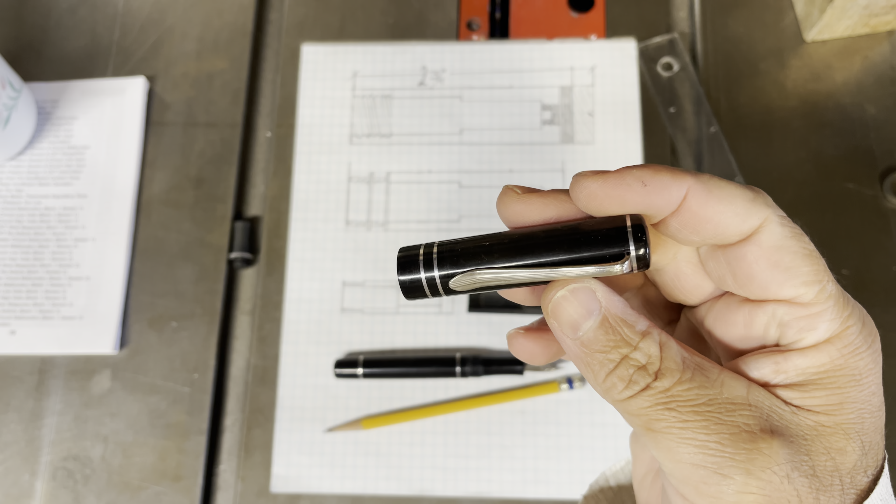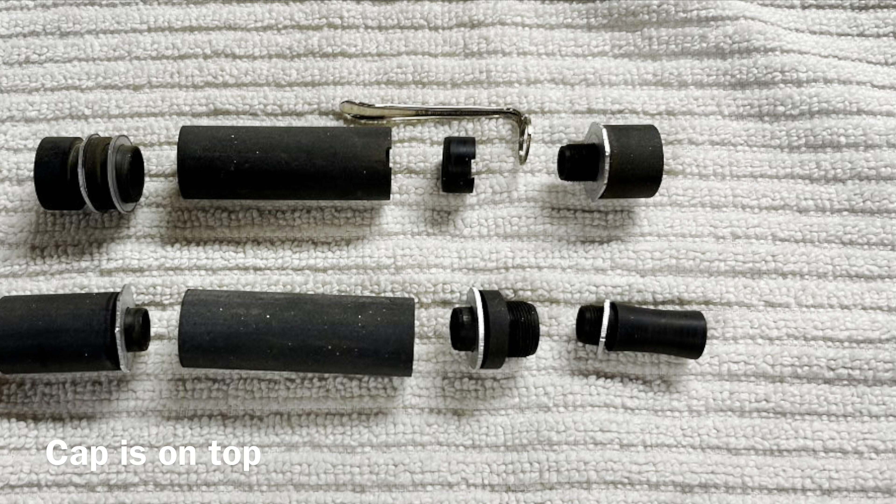In this video, I'm going to be working on the cap again, redesigning this. I like the way this cap came out, but I ended up using a whole lot of ebonite to make this, and I'm trying to simplify that process down. Exploded view of the cap on top. So I've been thinking about it for a while after I made this, and although I like the way this unscrews, I think I had overthought it and made too many components in order to make a simple pen cap, even though there's nothing simple about it. So with that, let's look at the drawing.

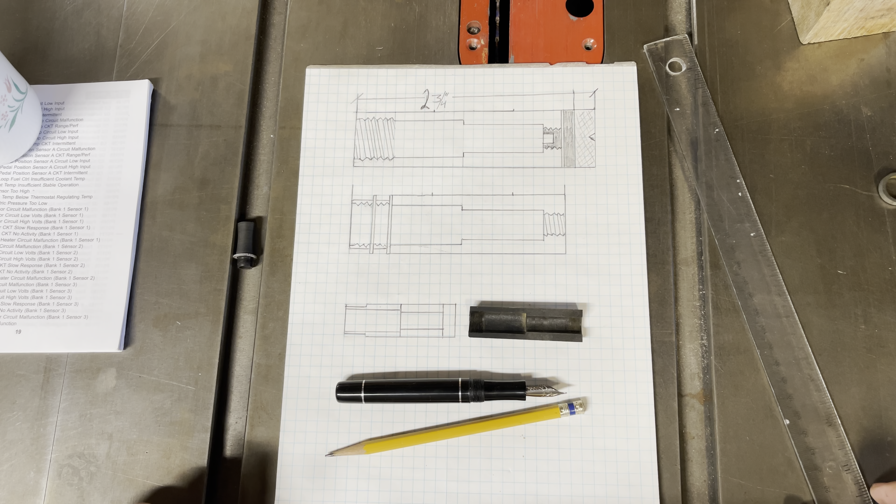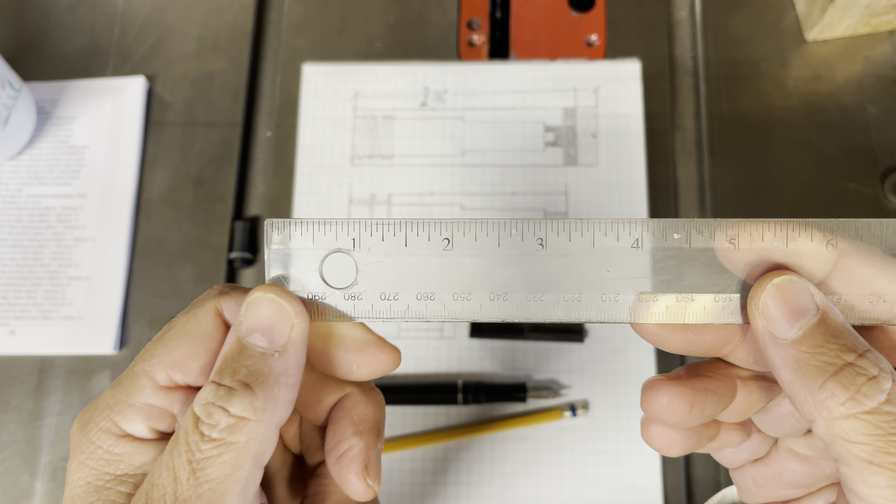And to help understand this, I drew this out on graph paper, and each square is 1/8 of an inch. So 1/8 of an inch here in the US, since pretty much we don't use the metric system as a standard, unlike everywhere else in the world. If it was metric, it'd probably be a lot easier to understand. But this is an American ruler, and one inch is divided out into 8 sections, 1/8 of an inch. You probably understand the concept, even if you're not from the US. So anyway, this is drawn out in 1/8 of an inch. So 8 squares is 1 inch. That way you see a little tab right there. Bring it in a little close. So this is 1 inch.

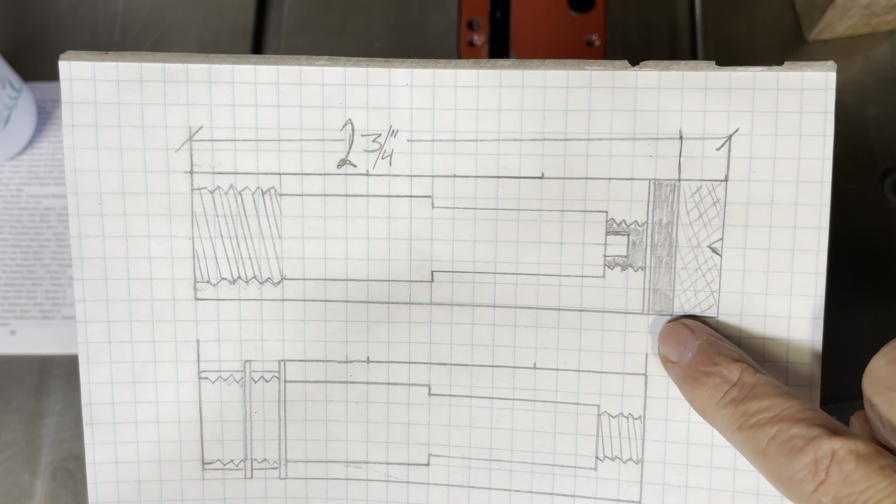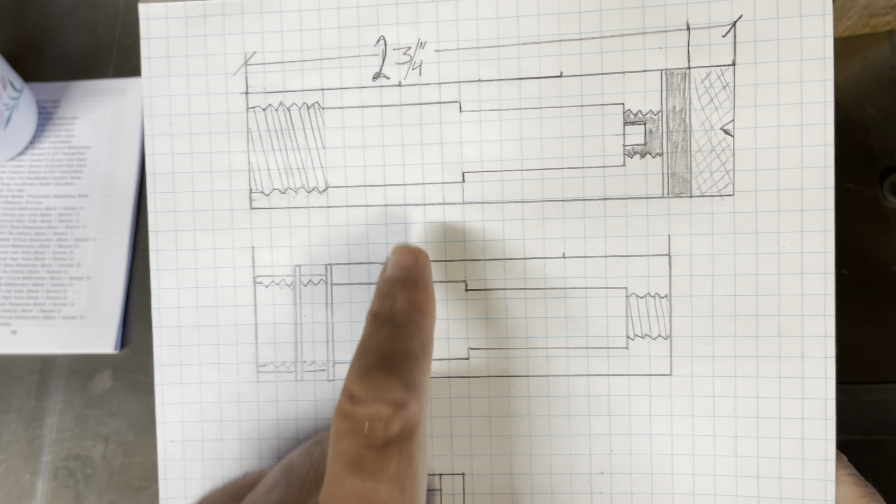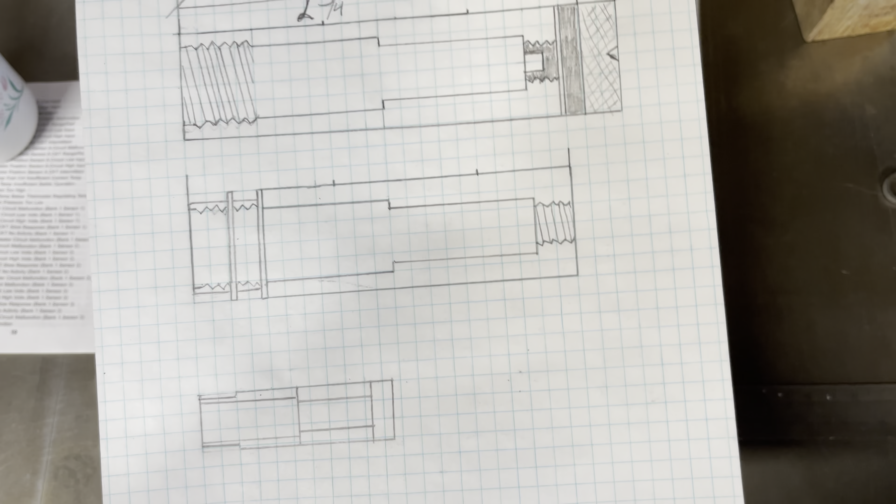This is 2 3/4 inches, and I'm working with a blank that's 3 inches long, and I'm cutting off 1/4 of an inch, and I'm using this for waste right here. That's why that's sort of hashed out. And then this would be the cap finial, like you see right here. This is the cap finial. So this right here is obviously for the pen in the section, and then the nib. And if I were to put this in here into scale, that would go in here like that. So you kind of get the idea, but without using quite so much ebonite like I did here. And I want to try something a little bit different by cutting off the outside, which would be over here on the bottom. Instead of working this way, I want to work the opposite direction.

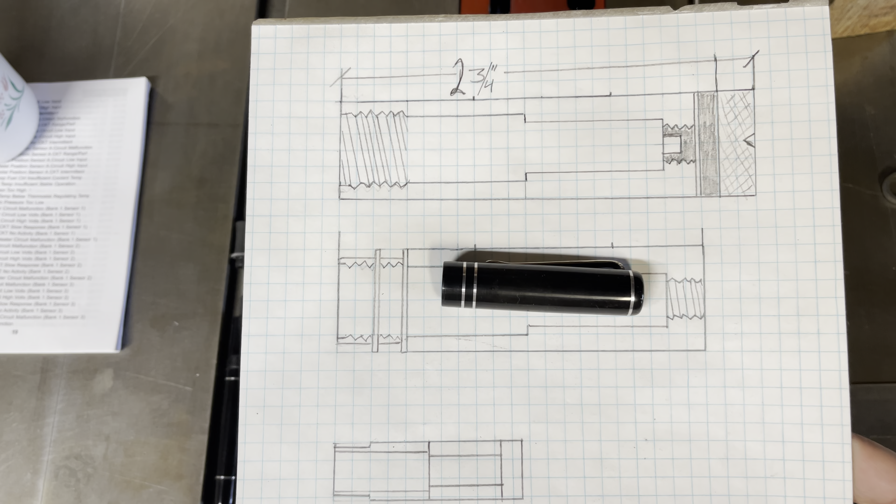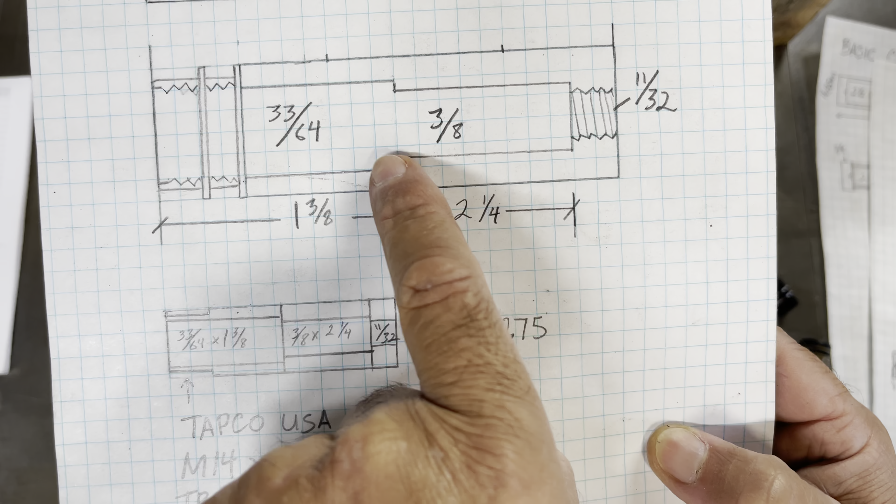All right, now let me explain a couple things here. This is 33/64 by 1 3/8 inch deep, and then I followed out with a 3/8 by 2 1/4 inches deep. So that's 1 3/8 to here, and then the rest of the way 2 1/4 inches total. That's the total length. This right here isn't 2 1/4 inches. From here to here is 2 1/4 inches deep. So you can see how that is right there like that. The first step is here, and then that is there like that.

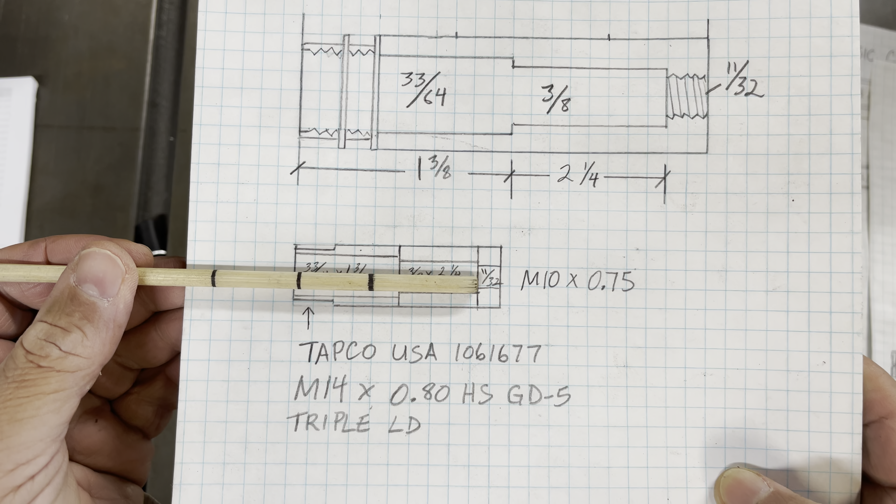And then I use a M14 by 0.80 triple start tap, and I got that at Turner's Warehouse. This is what it's called right here.

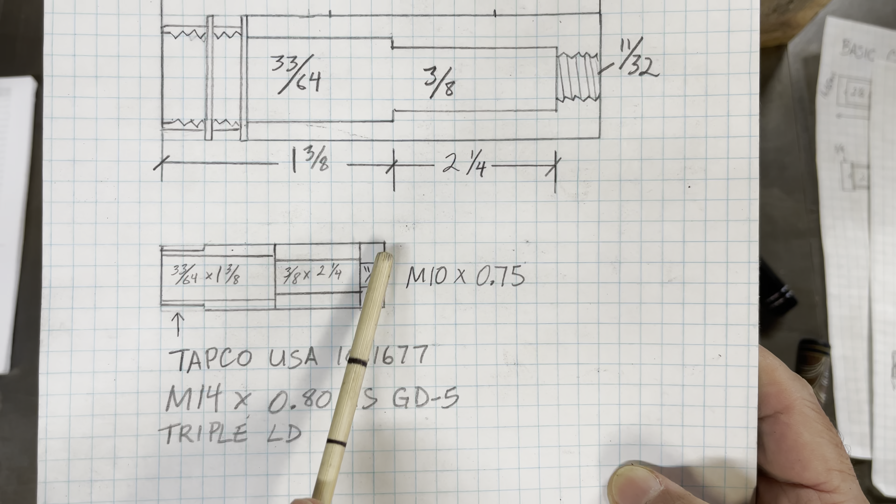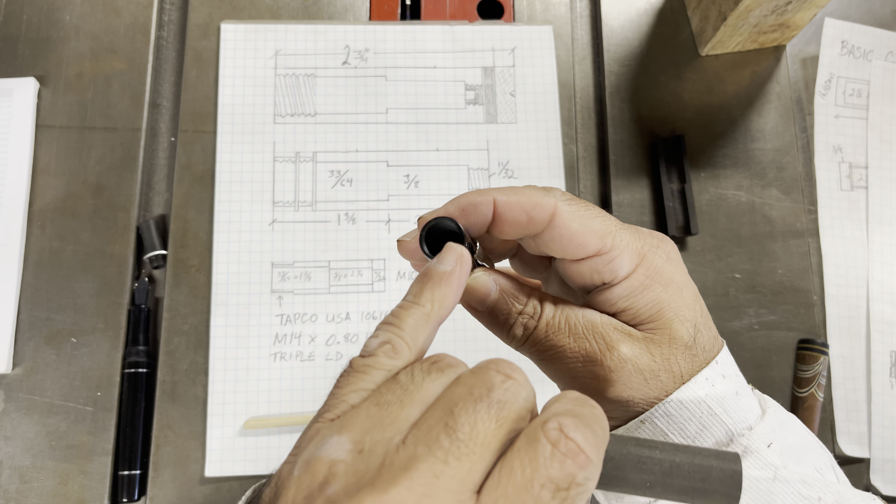And then for the thread for the cap right here, for the finial, it's M10 by 0.75. So now let's look at the cap. And this is the end. So according to the drawing, this is the orientation. This is where it's threaded right here for the finial. That is this end right here. So this end is obviously here. Now if I undo that, you can see how this is stepped down. This is threaded here.

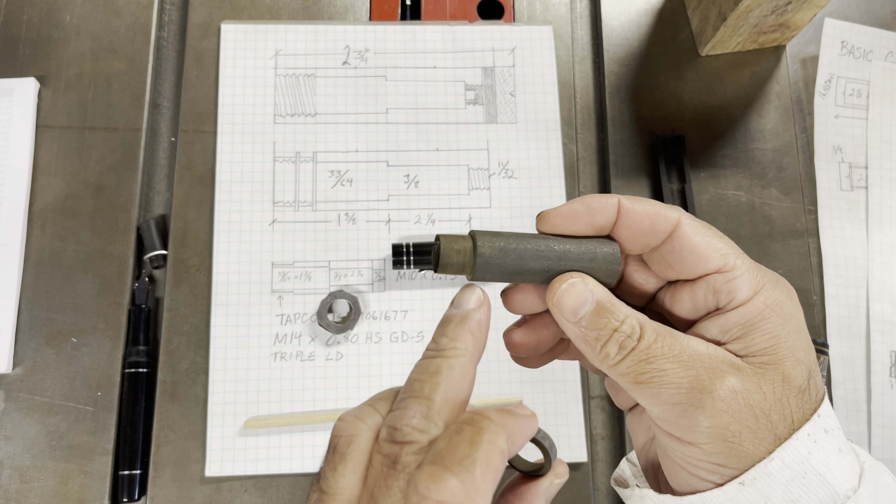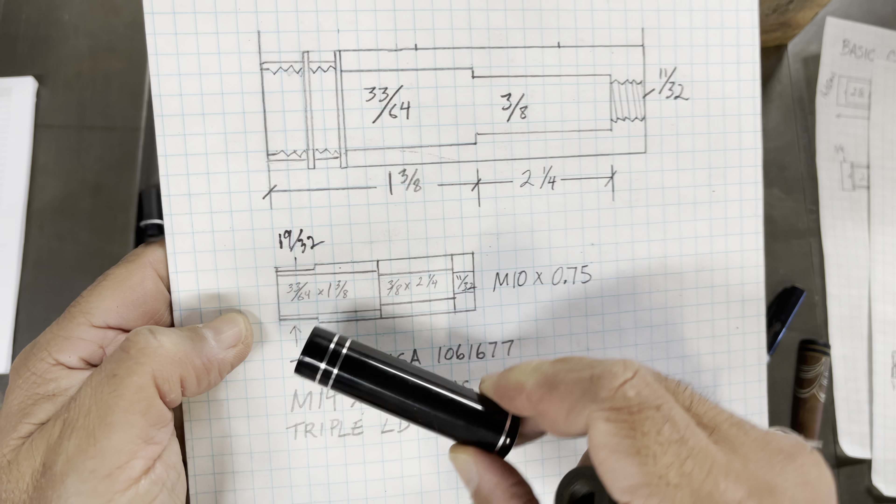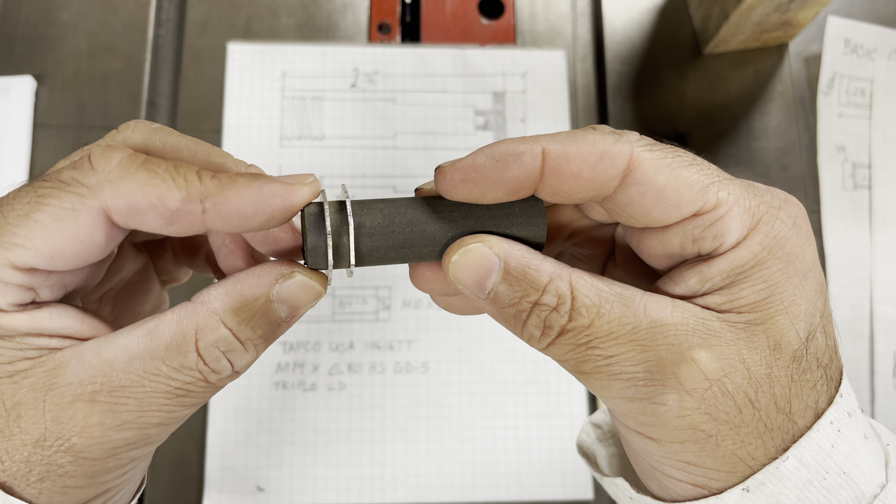This is a 33/64, oh, sorry. So this outside diameter is 19/32. That is 19/32 right there. And you can see the shoulder right there like that. So I used a 19/32 drill bit to drill this out. This would go on like that. The same thing with these. Goes on here like that. Put 2 of those. And then a final collar, which goes on like that. And then that is what that looks like. So the next thing to do is just glue this all up and then turn it down. And then we'll come back when all that is done.

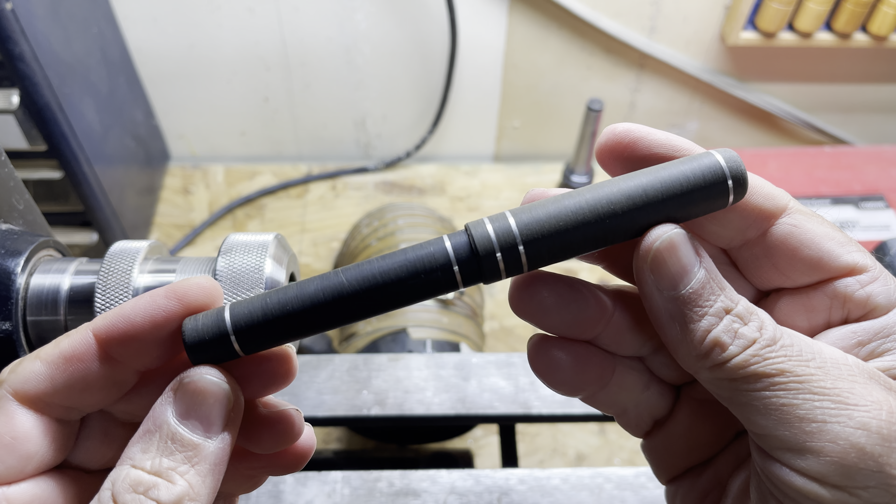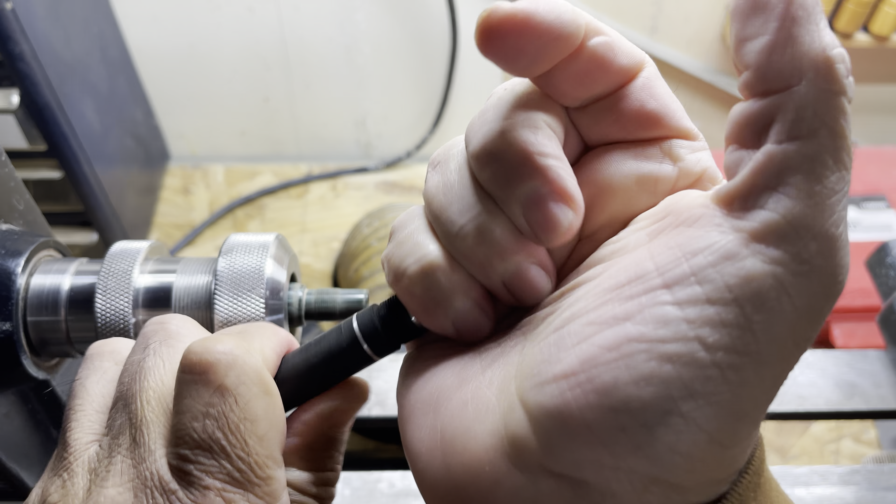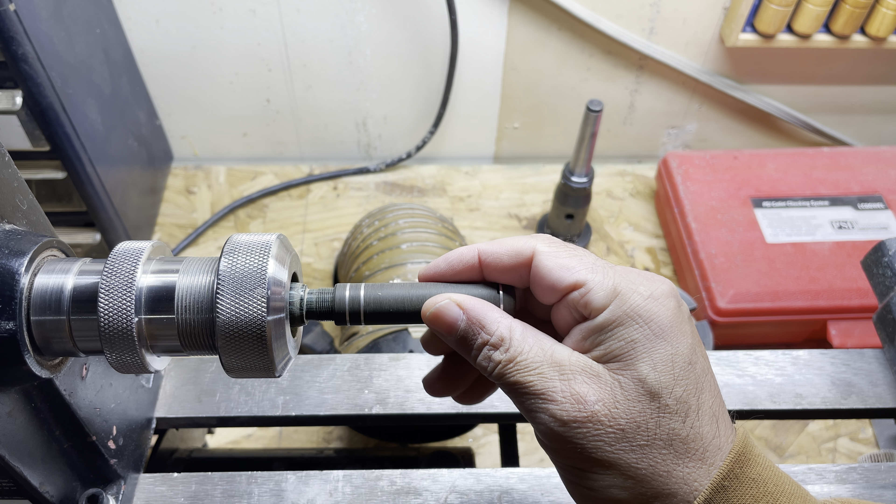All right, we're back after a little bit of work off camera. I've got this just rough shaped and sanded. You can see that's the lower. I added a beauty ring here to the section. And let me see if I can unscrew that. See what that looks like right there on the bottom. That's just glued in. And so the next part I'm going to do off camera is I'm just going to wet sand everything. That'll be for the cap, obviously. And then if you haven't seen this little jig before that I've made, this also will hold that right there like that. And this is just a simple piece of scrap ebonite.

Just going to unscrew that. So this is tapped for triple thread. I have another one that's a little bit longer that I have for double thread. So this is the other end like this. So I can flip it around in the headstock here. So it is my mandrel for both ends of this pen. Just a simple piece of scrap, nothing high tech, and works quite well.

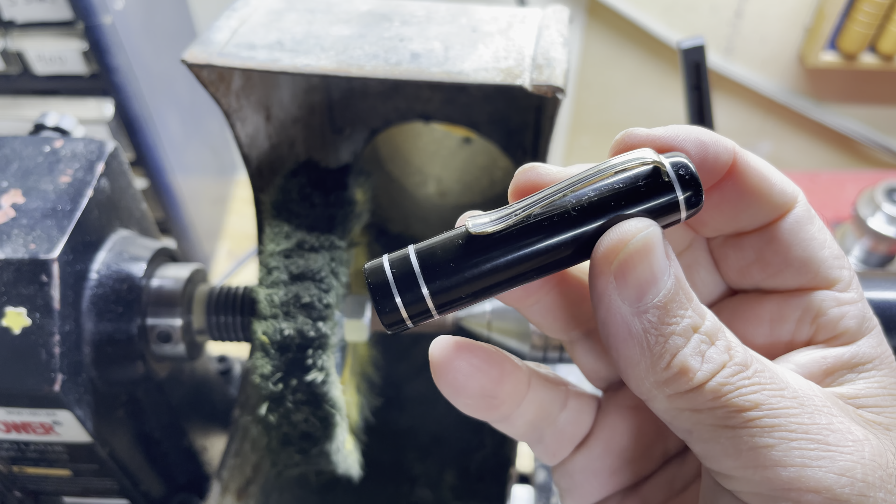All right, here we are at the end of our video. Now this is that cap that we made, and it's pretty much styled off of the other one. A little bit different. This is a little bit longer here. The band is a little bit wider, but that's okay. Just trying different things. And otherwise, everything looks the same. The clip obviously is shorter. I haven't made a new clip for this yet, but you get the basic idea how that looks. So just like this one here, I made a new body and section and a tip right there, nib.

And when you put it all together, you see the lint on there, but compare that to the previous one I made, and that looks really good. Some slight differences, not exactly alike, but really nice nonetheless. I really like this design. I think I'm going to do one like this with an ink view window next, and a couple other modifications, because one design usually leads to a different design, but I really like the change up here from how I made this one to sleeving it this way over here. So with each particular pen, it's a new learning experience. So I hope you like it.